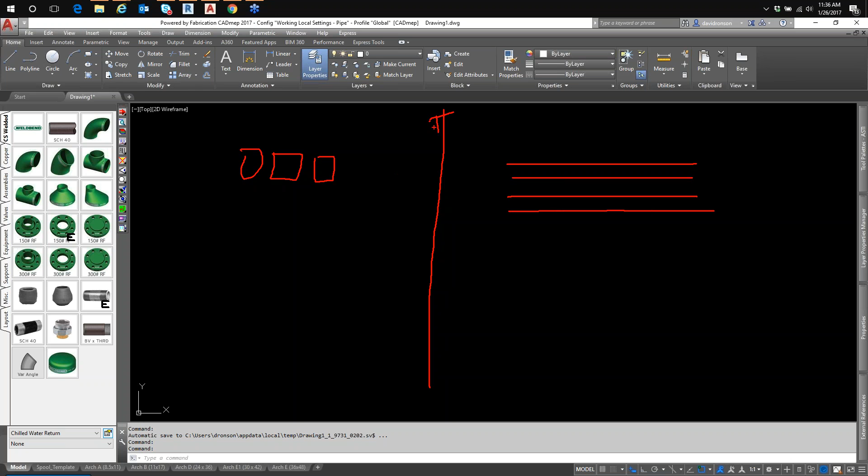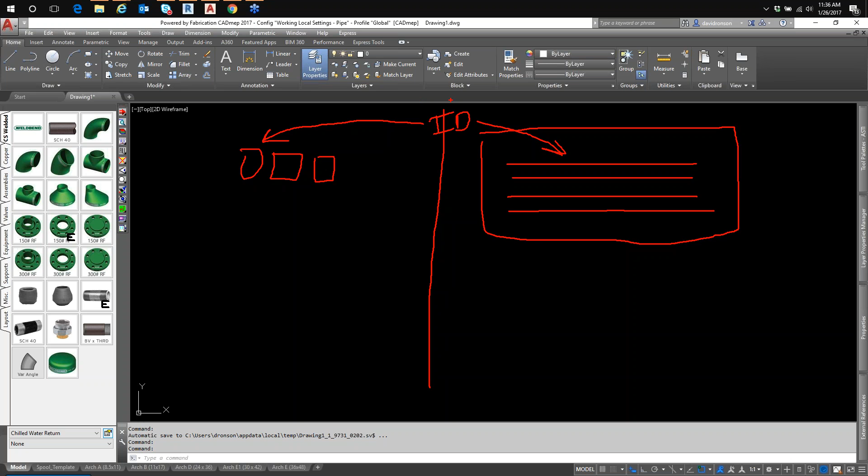So on the left side here, we have the ITMs, okay? On the right side of the screen, we have MapProd. And MapProd is just lines of text, okay? And in the middle here, we have the ID of each fitting. So the ID is what connects the two. You have the ID in the fittings, and you have the ID in MapProd. So when we run a report, we can get information out of MapProd through the ID, okay? If that makes sense to you, and I'll explain that a little bit farther here.

When I go into an item, we look at the product list here. You'll see an ID listed for each size, and that's how fabrication is making that connection into MapProd. Now let me go ahead and pull up MapProd so you can take a look at it. There's two ways to get to it. We can go in through the C drive, Program Files, Autodesk, Fabrication 2017, CAD MEP, and MapProd. Okay, this is more or less the way you used to have to get to it, before Autodesk got a hold of it.

The other way is through your Start menu. I have Windows 10. If you don't have Windows 10, if you have Windows 7, or I think 8 still works this way, and go to your list here. Unfortunately, it's not listed under Autodesk. It's listed under F, fabrication, and we have the product information editor. There's the product information viewer. It's pretty much the same thing, just one you can make edits and one you can't. So I'm going to launch that up.

First thing that happens is I'm prompted to select which configuration I want to view the MapProd information for. If you just have one, you may not get this prompt. I'm going to go ahead and click OK here. All right. So, like I said, this is just more or less a similar spreadsheet of information, and this is all editable. We can click on each entry and make changes. And this ID column here, this is how it's making that connection between the items themselves and the information that's listed for that item. Okay.

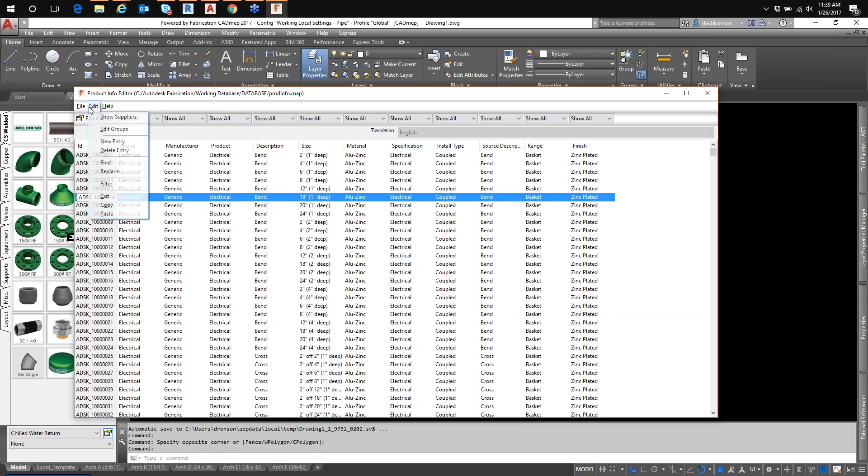All right. So, how do we edit MapProd? There's a couple ways you can do it. Let's come back here and let's edit this fitting. I'm going to copy this ID right here. I'm going to come back to my MapProd. I'm going to go to Edit, select Find. I'm going to paste in that ID. All right, there, it took me right to that ID.

So let's say that for some reason I want this elbow to read, instead of LR, I want it to read long radius. I can make that change right here in the item, okay? And if I'm reporting the MapProd entries, I will get elbow 90 long radius instead of LR, okay? So let's go into, I'm going to place that fitting.

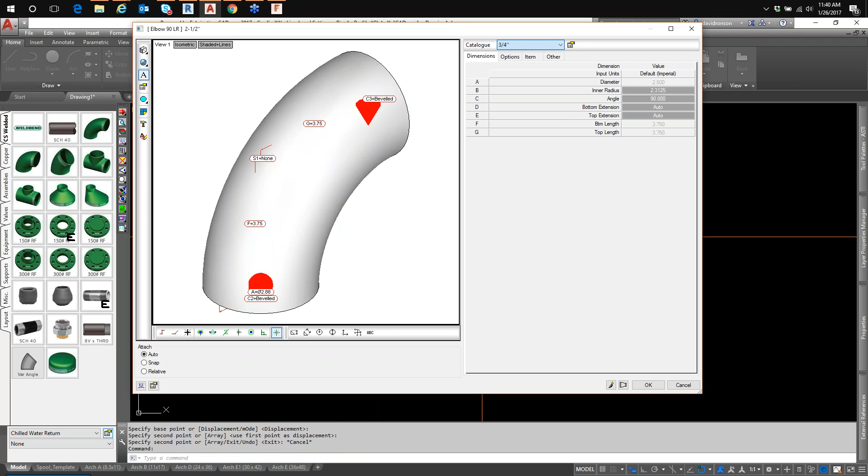And I'm going to make a copy of it, and we'll place the, which entry did I edit? Was it the ½ inch? I think it was the ½ inch one that I edited. Let's put in the ½ inch. There we go. All right, I'm going to run a report against this.

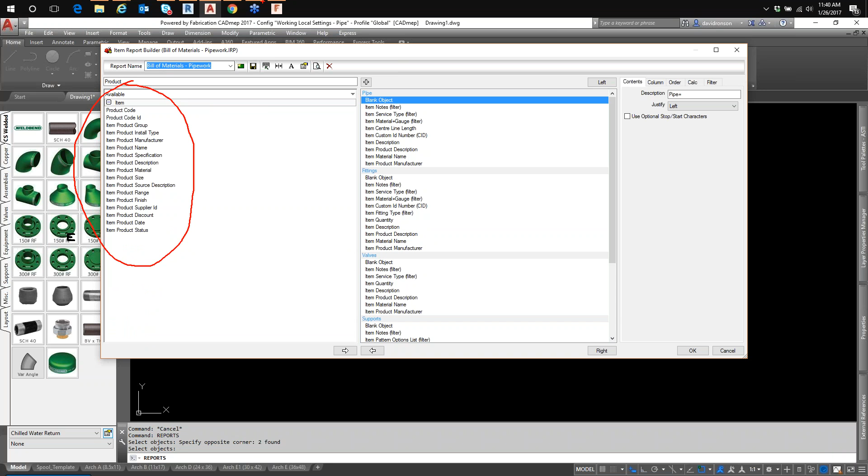Now, in our fittings, if you look at the print objects that we're using here, we have product description, item product description. Okay, if I come over here to the left side and I type in product up here on the top left, everything you see here is going to come from MapProd. Okay, so oops, let's pull that back up. All those product entries are coming from one of those categories here. ID, group, manufacturer, product, description, size, everything listed there.

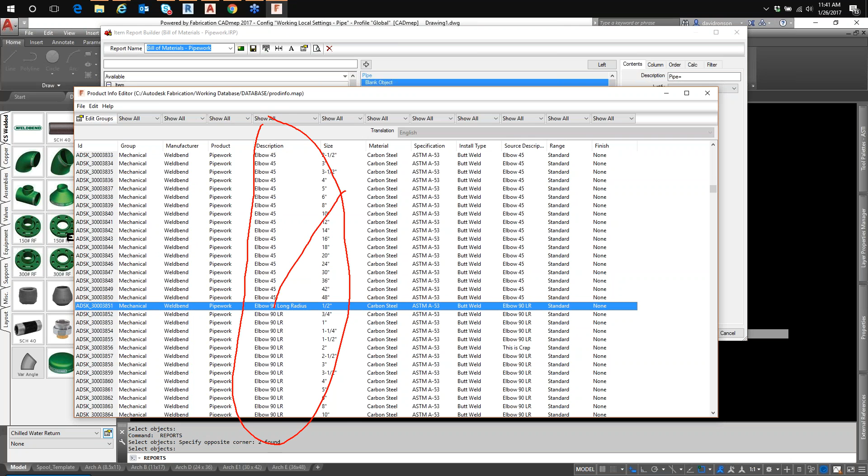So this one is calling the product description. So we're calling from this column here with that print object. Okay, so I should be getting that data when I run this report. I'm going to hit print preview. All right, and I didn't get it. I think it must be a different size.

No, you did a ½ inch. That was in MapProd. You did do a ½ inch, man. I think that you need to actually revamp the config. So close out, throw another one in.

No, what you have to do, basically what happens is when you load the program, it creates a cache of the MapProd. Because I edited MapProd after I loaded the program, I'm going to save this. Save it on the desktop. I'm going to close CAD completely down, reopen. It has to go back and reread the information in MapProd.

In the past, unless I was mistaken, I thought that you could update it dynamically, make changes, and then run a report, and it would pick up that information. But after testing this specifically for putting together a presentation here, I found that I had to restart the file in order for those entries to change. I'd be curious to see if an update from source. I think I tried that.

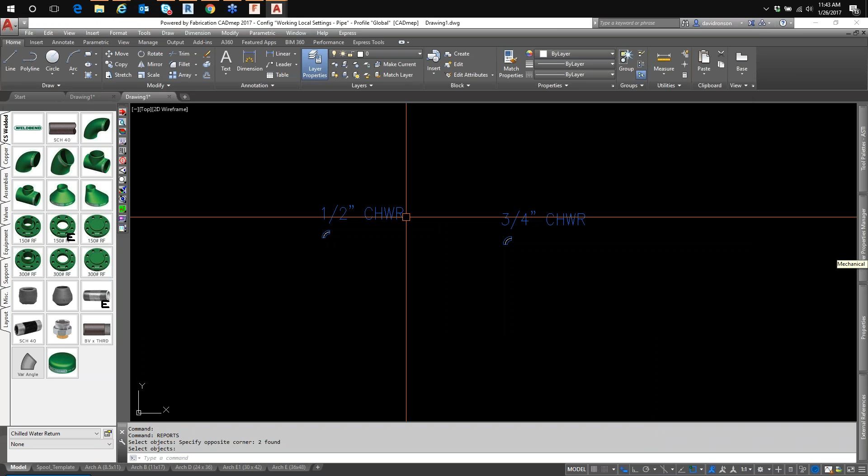Oh, Sean's popping in here. What's he saying? You didn't save your changes in MapProd. Oh, genius. I think I'm gonna have to restart again. We'll try it out. Yeah. Let's try it one more time.

I'm glad we have somebody like Sean to point out whether or not I need to save. You'd think you would remember something like that.

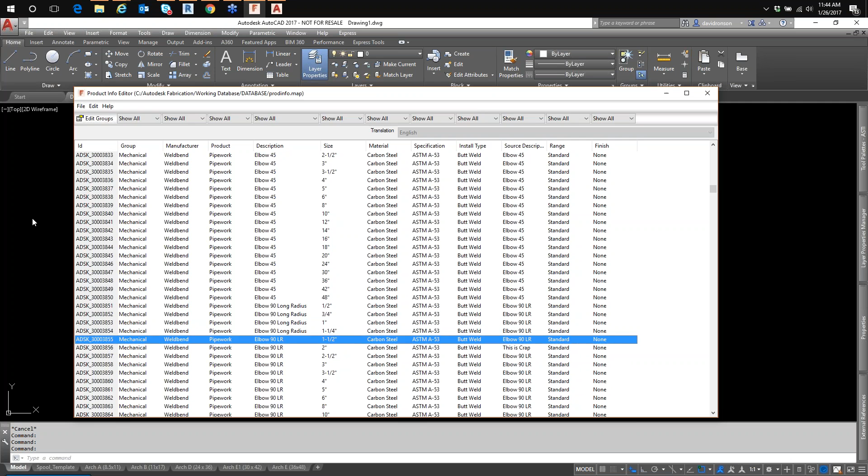So while this is loading, because MapProd is just a list of text, I can make that change in MapProd, but what about this next one? And what about the next one? You follow what I'm saying? So I could go in here and I can hit copy, paste, paste, paste, right? That takes a while. So what we can do is we can take that out to Excel and use the Excel features to change that information in mass. Let's get this file loaded first.

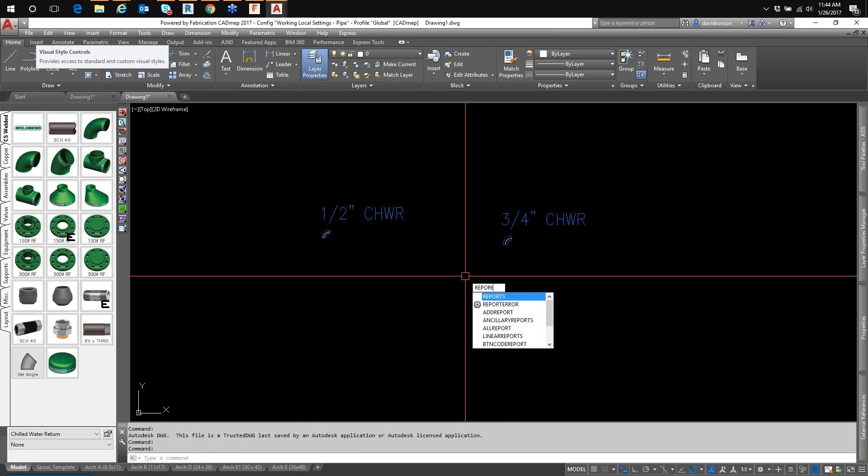Better work this time. There we go. Okay, so I've got a long radius spelled out and an LR because I changed that information in MapProd.

Sometimes if you own your own database, or maybe you don't own your own database and you've named a fitting, and in retrospect you're like, oh, you know what, that really wasn't the right name for that fitting. If you're using MapProd, you don't need to try to come up with some script to go in and search and replace and all this kind of stuff. You can just go into MapProd and make that change, and it'll be reflected after restarting the model.

Okay. So let's go back to MapProd. And what I can do is I can select all of my long radiuses here, right-click copy, and I can open Excel and paste, okay? And all those entries come in, pretty slick-like. And I can just grab that, drag it down, select all of this, jump back into MapProd. I believe I have to go all the way down to the bottom. And right-click on this green option down here and hit paste.

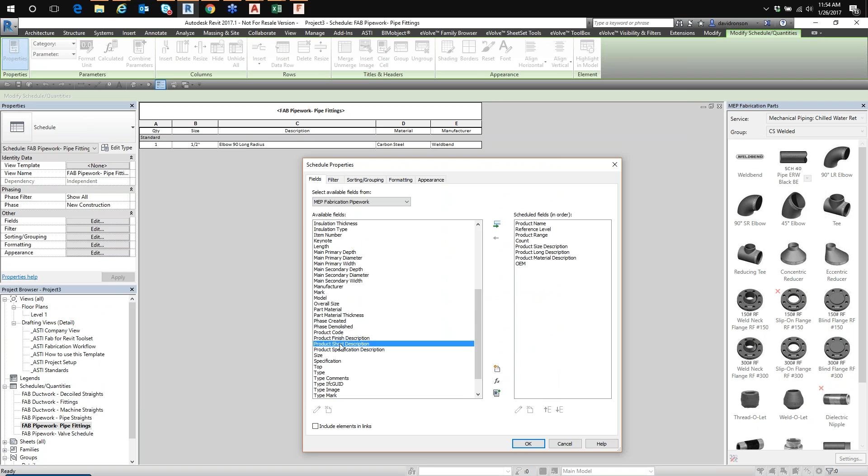Short description is source, no. I've got regular description. Yes, this is source description. Short description is for source description. There's also a long description, it's not on the left side because I'm using it on the right side. There's a long description, and that's coming from this column here.

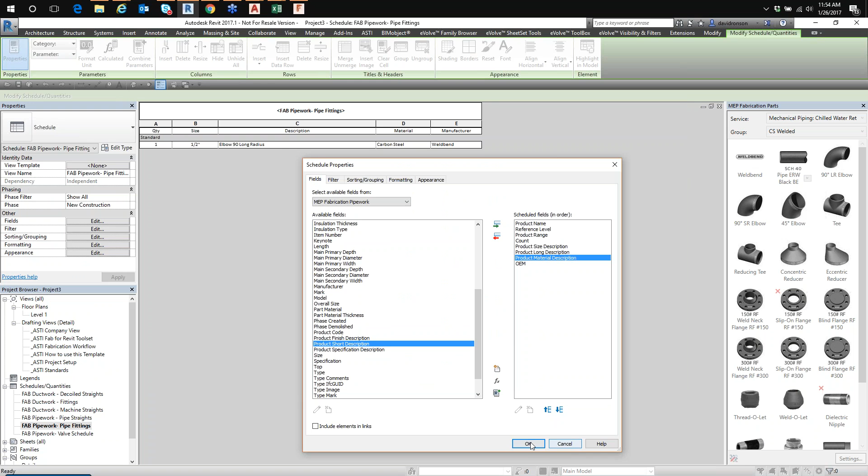Let's see here. Product size, that's pretty self-explanatory here, size. Material, that's self-explanatory, this material column here. It was the short description and the long description that kind of got me a little bit turned around which one was which. Okay, so what happens, I'm going to come back here and find that fitting again. What was that ID that I selected?

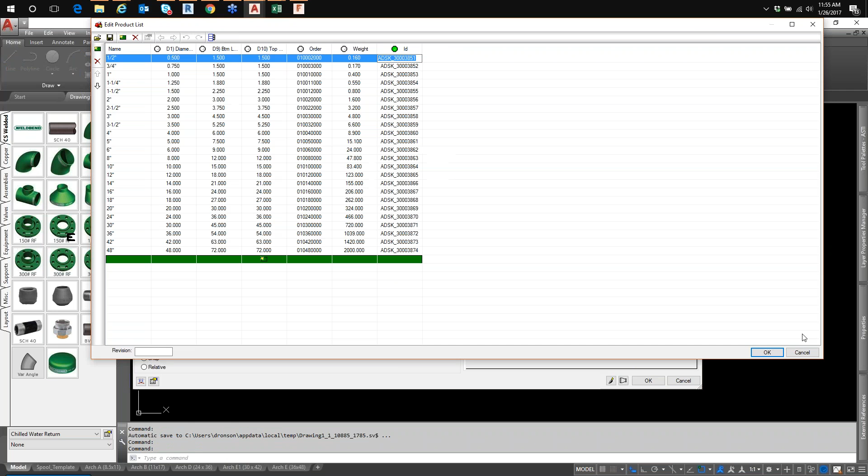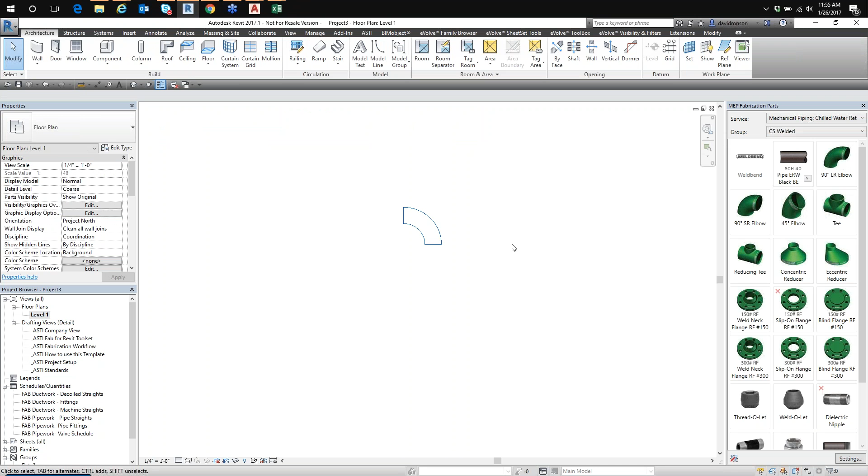All right. So let's change this back to LR. I'm going to hit save, close. I'm going to save changes, yes. All right, so the AutoCAD workflow would be to make the change, save them in MapProd, and then restart the model. In Revit, you would reload the configuration,

and you would think that it would update that information because it's supposed to be reading from the product information. Well, it doesn't. So the whole point of me showing you this is just to show you that it doesn't work that way. Basically what's happening is it's creating a cache in the Revit model, and it's staying in the item itself.

If I place, let's see here, let's go back to the drawing. I'm going to place another one, and let's go back to the pipe fittings. All right, you'll see that change showed up, but now they're two separate fittings, but they're not really separate fittings, they're the same one. So keep that in mind. And I can't edit it here, there's really nothing I can do about it.

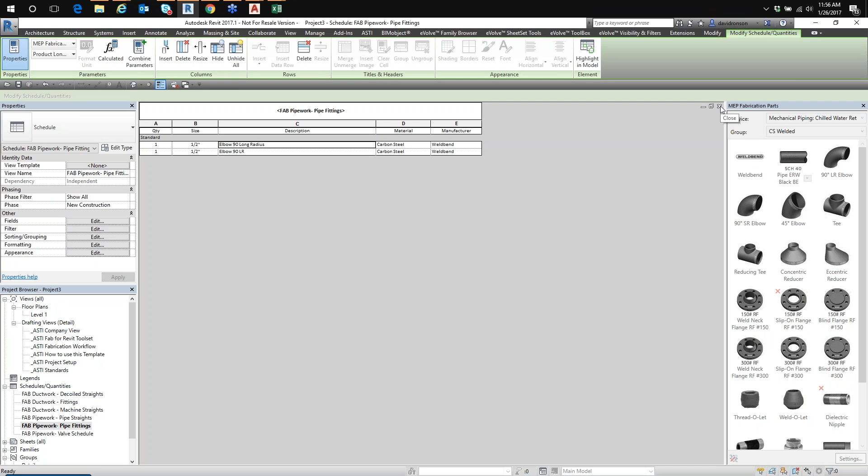So if you make changes to MapProd halfway through a project that you're doing with Revit, you're going to end up with different lists of items, but they're the same. Hope that makes sense. They're different, but they're the same.

All right, what else? There's not a lot else to show. Most of it is just editing in Excel. Let me show you this, the suppliers. Let's jump back to MapProd. So a lot of suppliers, they all have their different codes and things like that. And in fabrication, you can have another code that you just made up for that item. If you go to Edit and Show Suppliers, you'll see the different suppliers listed here, and for that item we don't have anything listed, but we'll come down here to something that has all of the items.

So this is my fabrication ID, which can cross-reference to the UPC number, which cross-references to the manufacturer's code, which cross-references to the OEM code. What's the difference between manufacturer and OEM? I'm sure somebody on the phone can clarify that. And then Harrison. So you got all these different IDs. So when you import a price list from, let's say Harrison, Harrison's code is 009AN, right? So it'll update based on that code and then be available to the item through the ID of the item itself.

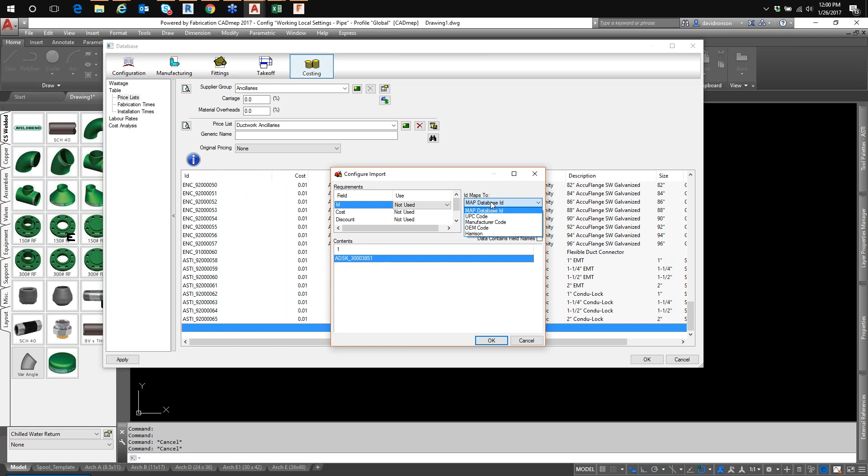So over there, ID maps to, is it the map database ID? You see that drop down to the right? No, on the right. Yep. So that's where you can select the code. So what's your ID actually mapping to? Is it the ID, or does your price list contain the Harrison code, for example? That's how it can run and do a search based off how you're maintaining your price list. I like it.

If you have another supplier that's not listed, you can create an entry for it, and then you come back and delete a supplier if you want. You can, I'm thinking about something else, never mind. That's about it to do with MapProd.

There's not a lot really to talk about. Really, the issue is understanding how it can benefit you. And in terms of benefit, I really like, at least with the AutoCAD workflow, being able to make changes to my items on the fly.

Like I said, in retrospect, a lot of times when you're building a database, you can't really foresee down the road that the way I name this fitting is going to be a problem. And you've got several drawings that have many of these fittings in it, and it keeps showing up on your reports, and then you're having to fix your reports after the fact.

If you're using MapProd and you're reporting from the product print objects, then you can come in here and make that change and basically be done with the problem. That's the big benefit that I see. And not to mention the pricing. If you're using EST, you have to use MapProd. Is that a fair assessment, Garrett? Would you agree?

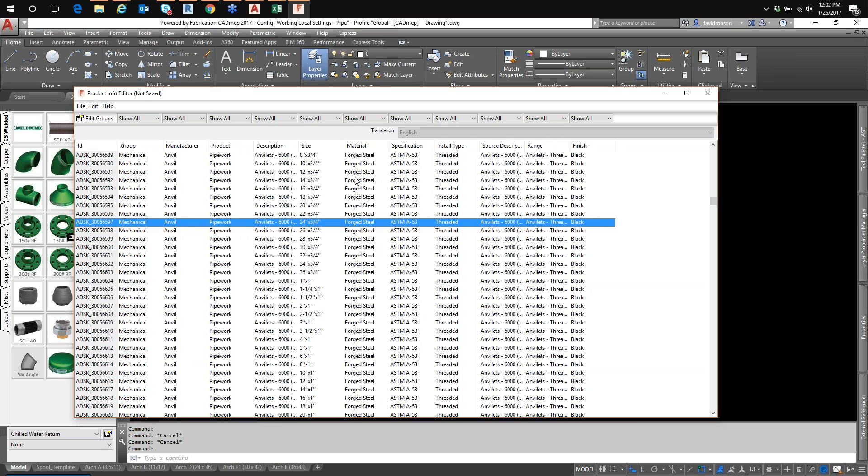So for example, I've kind of been monitoring the question pane. So pretty much everything from size over, right? You've got material all the way to finish. Pull up a price list, maybe go to Harrison, and just show what actually stems from MapProd inside of a price list.

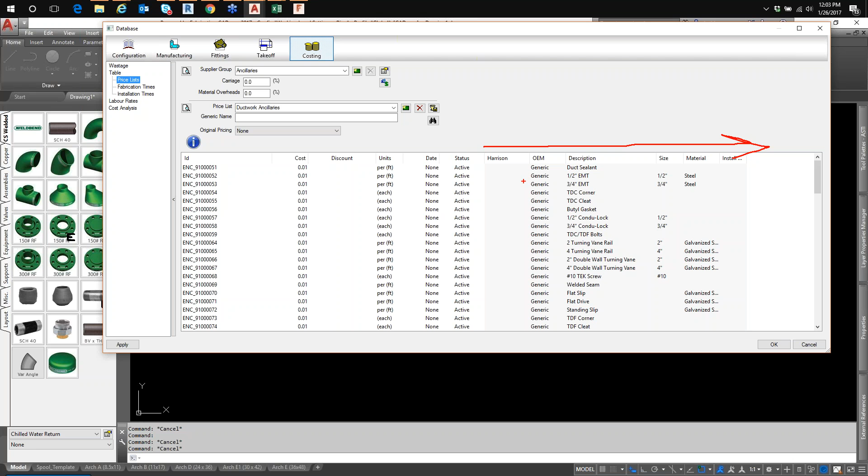When you're updating your product information editor, it allows you everything in gray. So from the right there, it says Harrison over. All of that, you will not get. It will not populate unless you have your product information editor populated with that data. Now that data you can get on a piece of paper. You can report it. So it gives you a little bit more flexibility.

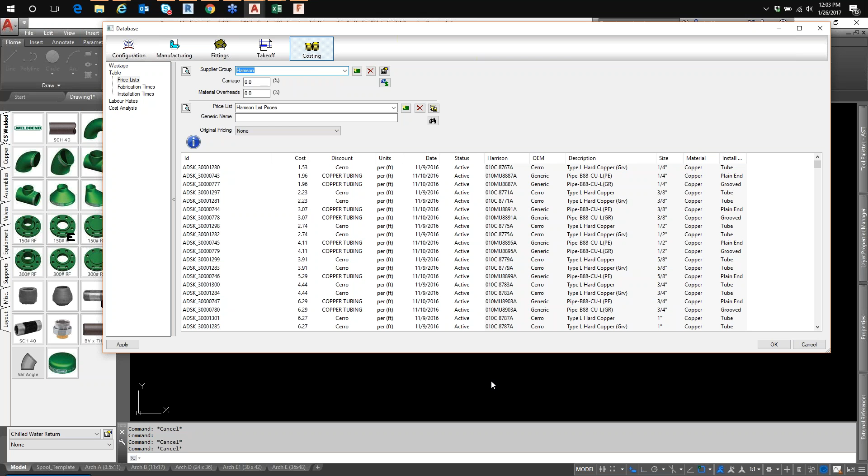David, you did talk about the print objects, product description versus item description. Product description is going to give you exactly what you have inside of there. For the product listed pieces, if you're using just item description in your report, you're only going to get a size. If you use product description, it's going to pull there. So just run a report, you've got product description in there, right?

Item product description, right. So if you had a piece in, that would pull from MapProd. Now, if you just put in item description, it's going to pull the actual name of the entry for that piece. So just throw in a piece there. It's going to be the product listed. No, so description would not pull that. Come from here. No, not there.

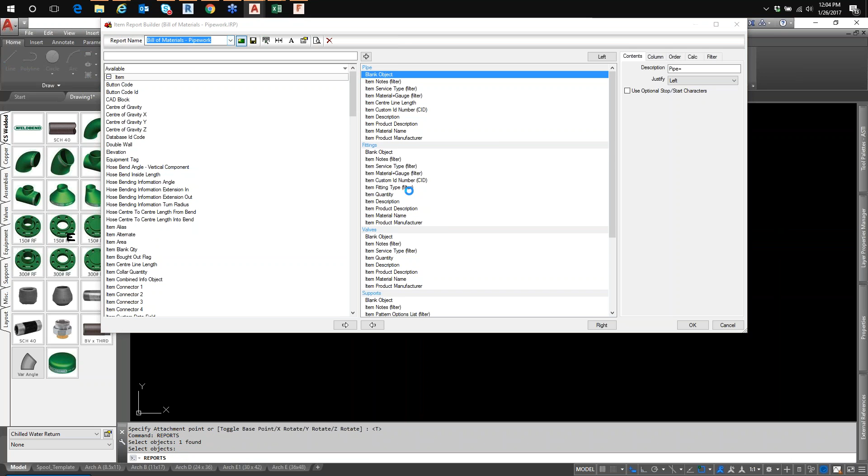With product listed pieces, just throw a piece in, for example. Let's say that the name of it is 2-inch. It's going to pull that right there. That is the description for a product listed piece. Oh, I see what you're saying. So if you go run a report, just start a brand new one and put item description. Put item description and run the report.

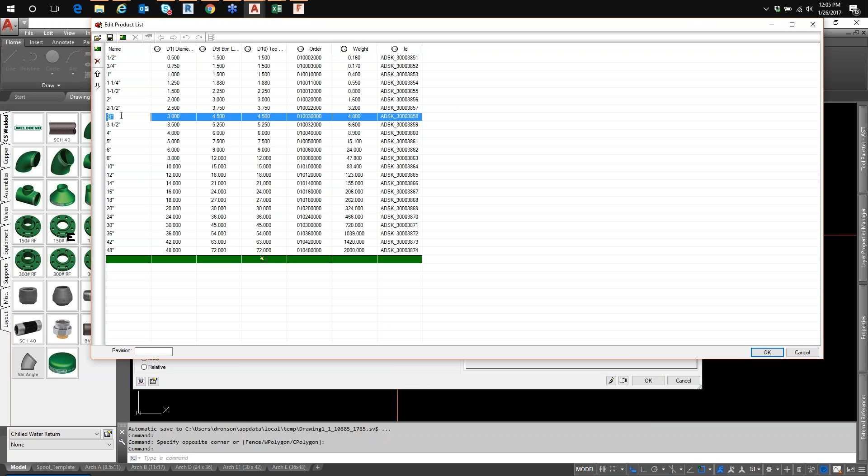And it's going to show you that size. So where that's coming from, hit OK, and now you can say product. That's going to show the MapProd, right? Now go back to the fitting, double click there on the item and go to the product list and change 3-inch to webinar, put some text in there. That's what's now going to be displayed on that report because you're using item description.

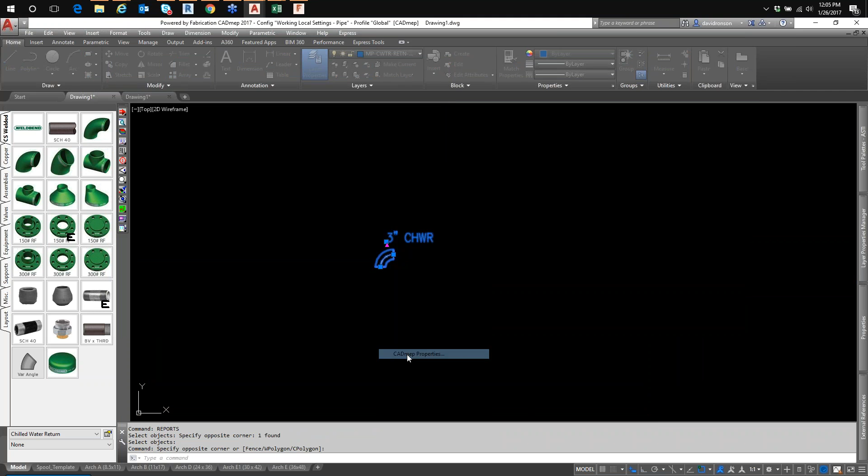Now, understanding these print objects, it doesn't happen overnight. There is a lot of testing that comes involved with it. Actually, that one didn't change. Go look at the properties of that piece. Did it stay there? There you go, change it there. There you go. I guess once it goes in, it pulls it from there. That's where it's applying it.

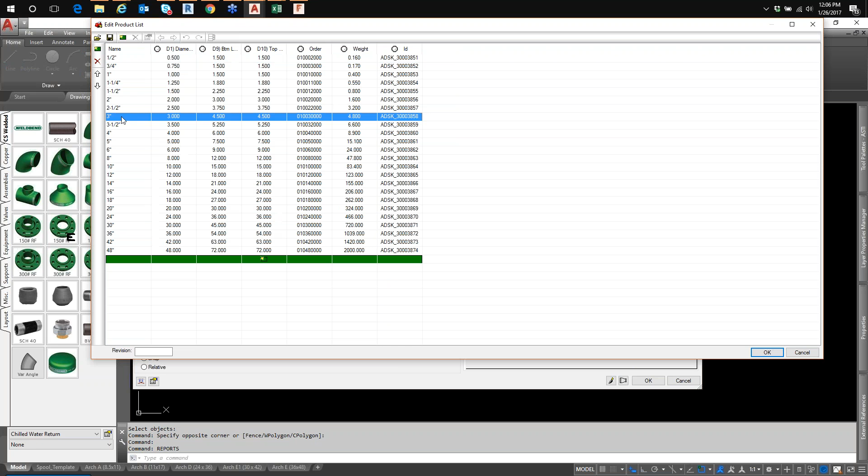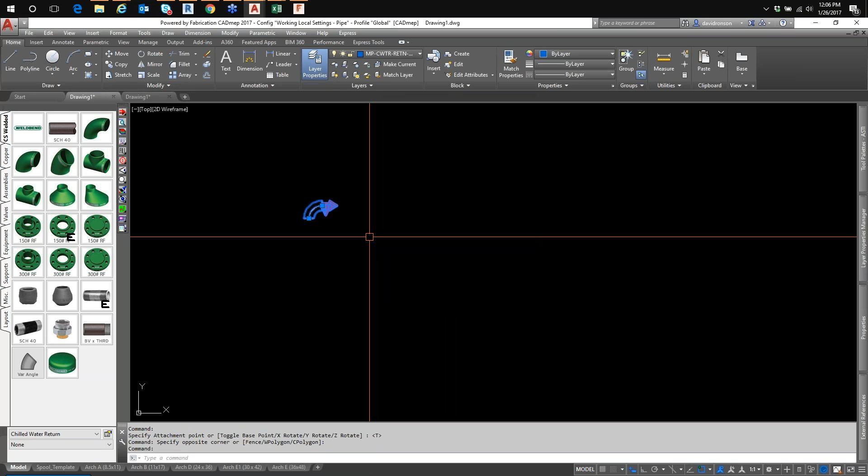But 9 times out of 10, you're not going to go change that after the fact. You're going to put it in and then wonder why it's showing 3-inch, and that's where it's pulling from. So if you were to edit it and then take a new one off, that's when you'd see that text come up inside description. Let's make the change here. There we go. That's what it's showing right there. Right, so it just basically takes the identifier of the product list and throws it in there.

Oftentimes I see, on the duct side, you can use item description as long as you're not product listed. Mainly your round on the duct side is product listed, not the rectangular. So duct guys can use description. Source file name, that typically works. But if you're wanting data from MapProd, you have to have that product in there that David showed earlier in the presentation.

Do we have any questions, Garrett?

No, there have not been any questions come in. Either it's so simple nobody really has questions, or it's so advanced it's just blowing everyone's mind. Yeah.

I don't think that this is anything advanced. There's not any major tricks. Obviously you need to know a little bit about Excel if you're going to do your editing in Excel. I pretty much always do all my map prod editing in Excel first, just because it's so much easier and faster to make changes, and then just import those changes into map prod. If you're just making changes to one cell, yeah, obviously you don't need it copied into Excel just for that, but usually you're going to be making changes to multiples at a time.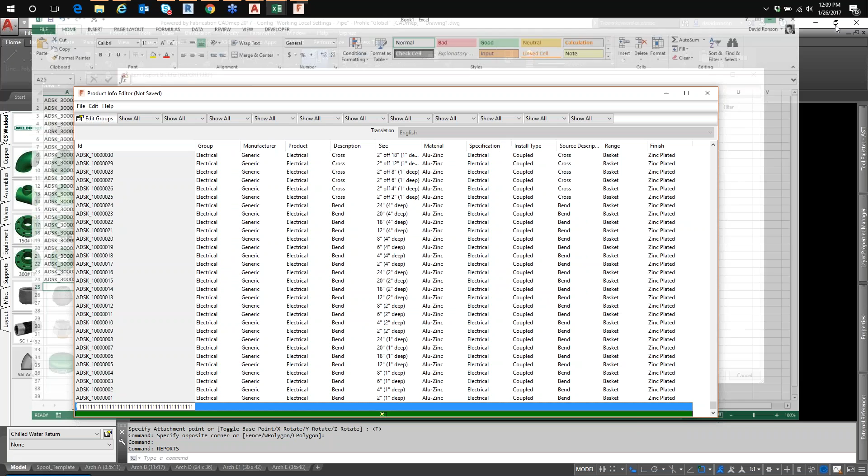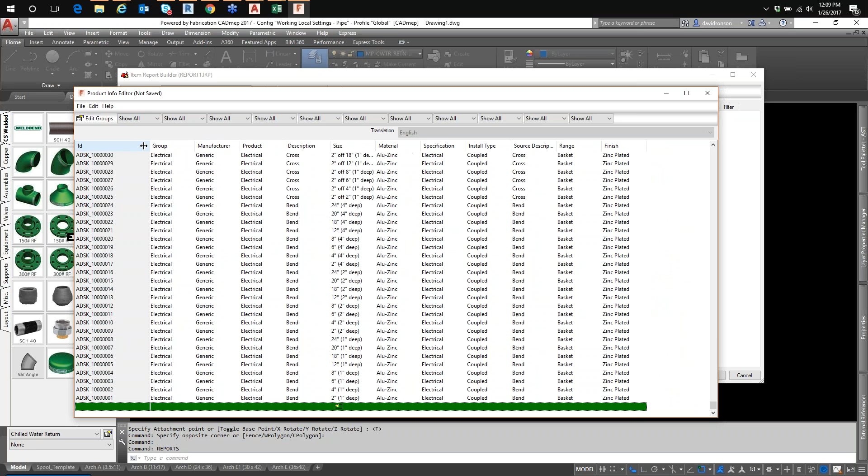I didn't think that there would be, but again, from our perspective, you would want to keep that manageable so that, you know, pretty much even in length. If one is 12 characters long, maybe you have your company name as a prefix, you know, your initials, and then you don't necessarily have to have a dash. It's so customizable. That's the benefit here. As long as you know what that code is and you're comfortable with that convention of naming your IDs, then you can manage and maintain that price list for years to come.

Josh Cravens says, can you hire me to do everything for you? We could talk about that, man. We could talk about that.

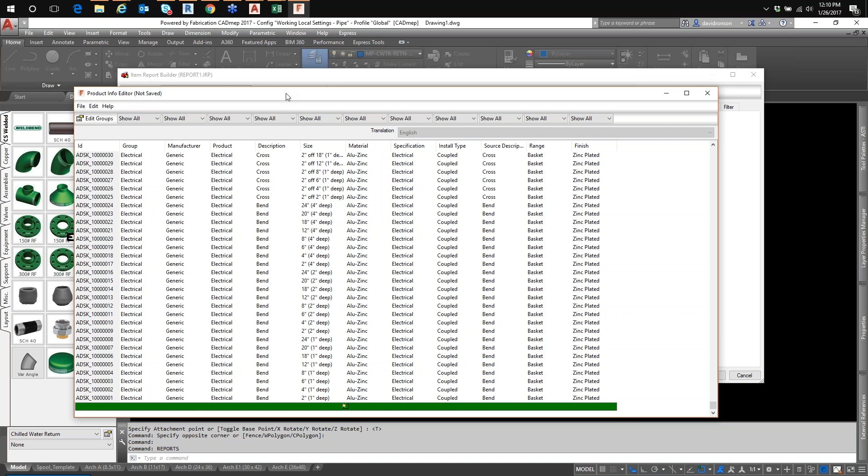Kevin, I'm pretty sure that answered your question, but if you're comfortable, just give me a thumbs up, yeah, we're good. That your question was answered there. All right, he said I'm good. All right. Josh said, I think we're good to go. I don't know what else there is to cover, unless we got more questions.

I'm looking here, I'm going to start to go through and get rid of the ones that are not there. No. All right, so I think that we're okay. Let's see. Oh, Josh. Anybody else have any questions here? I'm monitoring the page, Josh. What happened, Mark? I said anybody besides Josh. Oh no, Josh can ask as many questions as he wants, man. You may not get them answered, but you're welcome to ask. Josh is used to getting ignored.

Okay, well, anything else? Any other questions, guys, before we wrap it up?